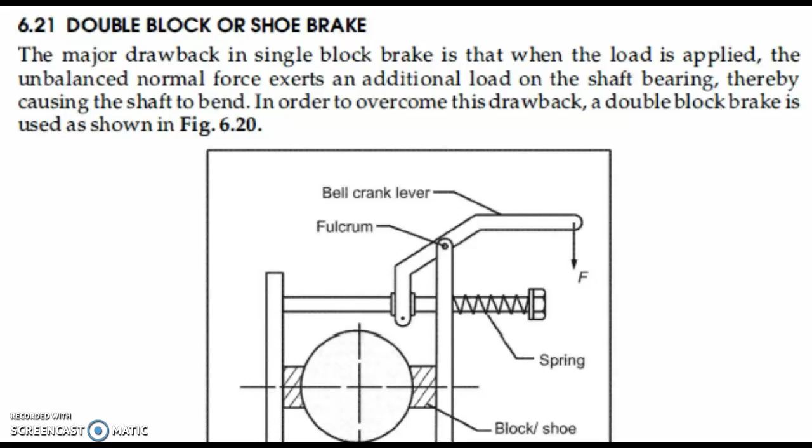Hi everyone. In this section, we will discuss the double block brake, also known as the double shoe brake. We already know about the single block brake, and we've done some problems regarding it. Now this is the double shoe brake.

Here, two hatched areas on the opposite sides of a drum are the two blocks or two shoes. These shoes are connected with a fulcrum, positioned on the bottom side. Then there is a bell crank lever situated on the top side. There is also a spring adjusted here, which is for releasing the block brake after the force is applied.

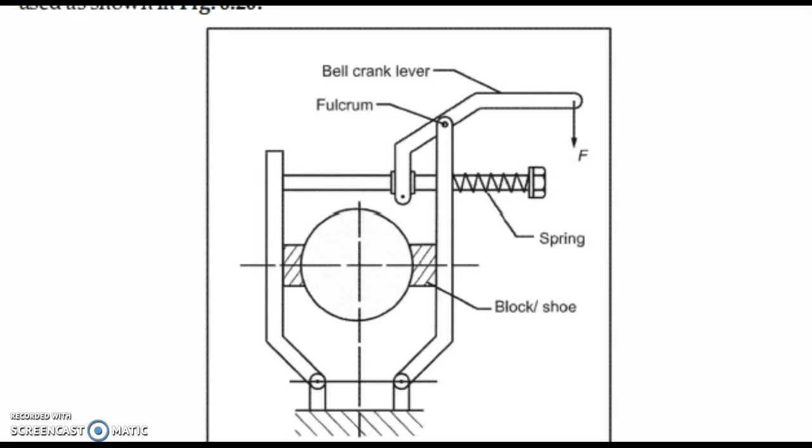Now, during free time, the wheel will rotate freely. While we apply a force here, the two blocks will automatically come to the wheel, and now the braking will happen. So we need to study how the torque will act on this figure, on this section.

Therefore we can write the torque as T equals Ft1 plus Ft2 into R. Now, what are Ft1 and Ft2? They are the tangential forces on the respective shoe. Since we have two shoes, we name them 1 and 2, so the tangential force on the first shoe is Ft1, and that of the second is Ft2.

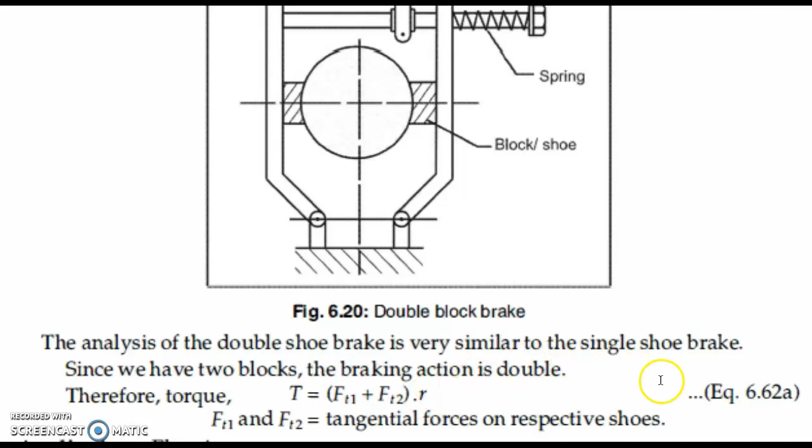This type of double block brake is generally used in electric cranes. Now we can discuss a problem.

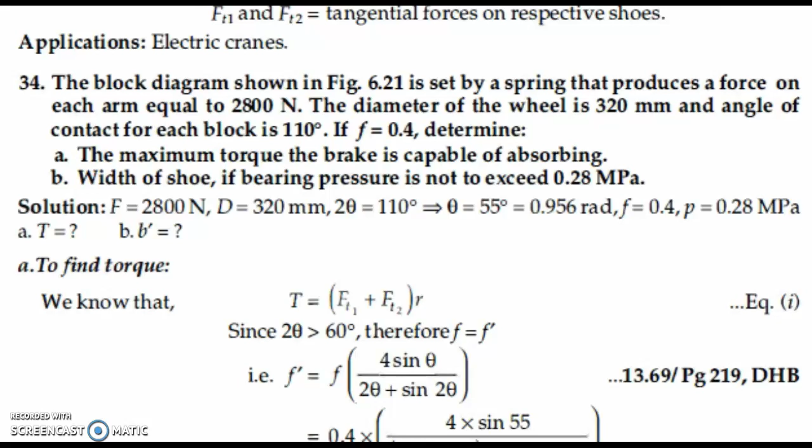The block brake diagram as shown in the figure is set by a spring that produces a force on each arm equal to 2800 Newton. The diameter of the wheel is 320 mm and the angle of contact for each block is 110 degrees. If coefficient of friction F is equal to 0.4, determine first the maximum torque the brake is capable of absorbing, and second, the width of the shoe if the bearing pressure is not to exceed 0.28 megapascal.

Now we can go for the figure. Here the angle of contact is 110 degrees, and the distance from the center of the drum to the fulcrum center is 200, and the distance from the center of the drum to the force side is 300 mm.

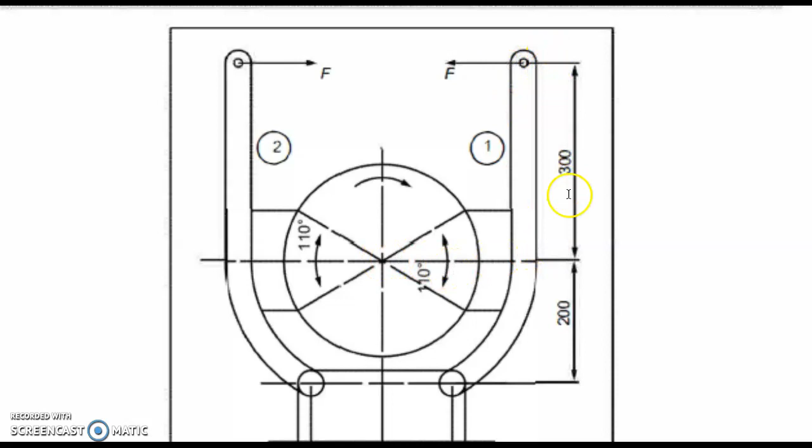Then the distance between these two fulcrums, from the fulcrum center to the center of the drum, is 50 mm. That of the other side is also 50 mm. Now we can go for the given values.

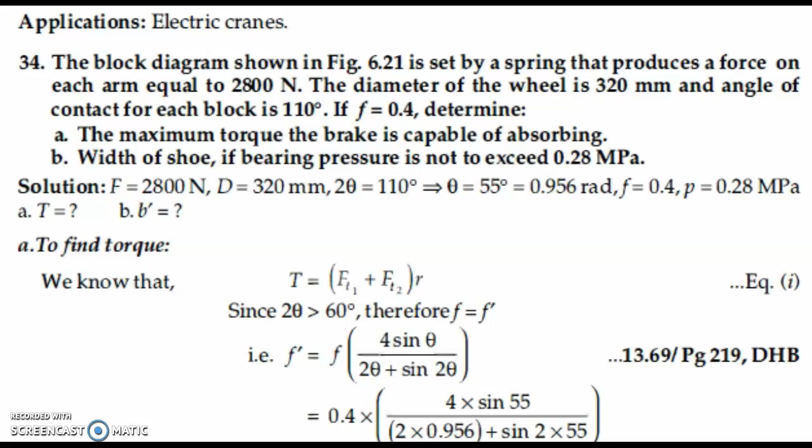What are the given values? Here the force is acting by a spring, so force is given as equal to 2800 Newton. Then the diameter of the wheel, or diameter of the drum, is given as 320 mm. Then the angle of contact of each shoe, we name it 2 theta, is equal to 110 degrees, or theta equals 55 degrees. Now the coefficient of friction is already given as equal to 0.4.

The bearing pressure is also given as 0.28 megapascal, which is given in the second condition. Now we can go for the torque. We know that T equals Ft1 plus Ft2 into R.

Now we have to find each Ft1 and Ft2, but here the value of 2 theta is greater than 60 degrees, because the given value is 110 degrees. So we have to find the value of mu dash, or F dash, instead of F or mu. The coefficient of friction will vary because the angle 2 theta is greater than 60 degrees; here it is 110 degrees. So we have to find mu dash. What is the value of mu dash?

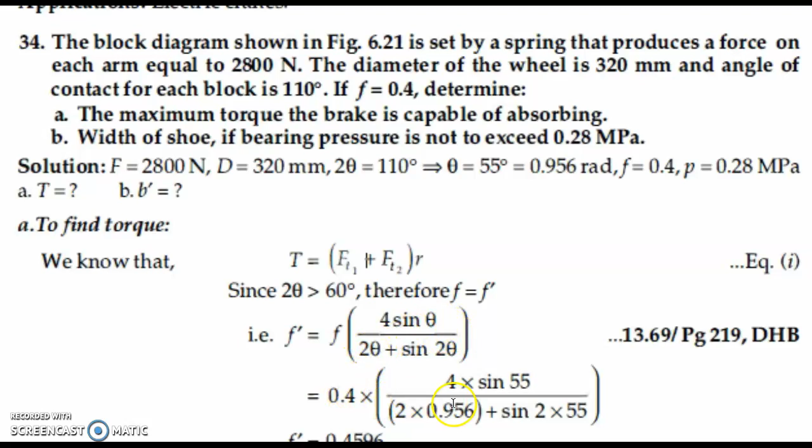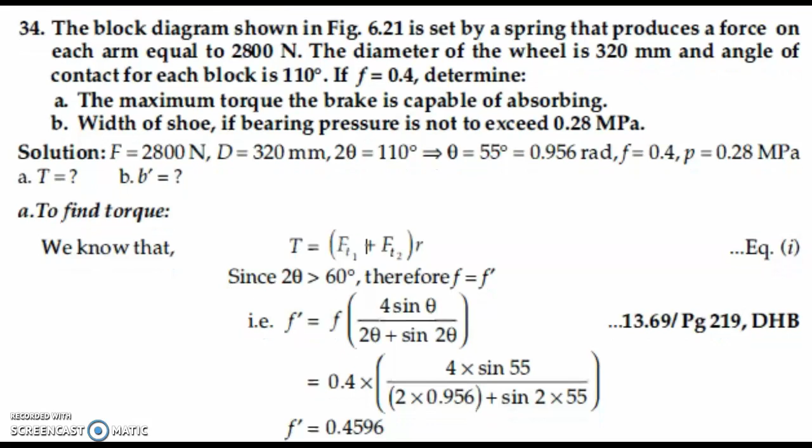Mu dash, or F dash, is equal to F into 4 sin theta divided by 2 theta plus sin 2 theta. Here theta equals 55 degrees. If we substitute these values into this equation, we will get mu dash equals 0.4596. Now we can substitute this value in the following sections.

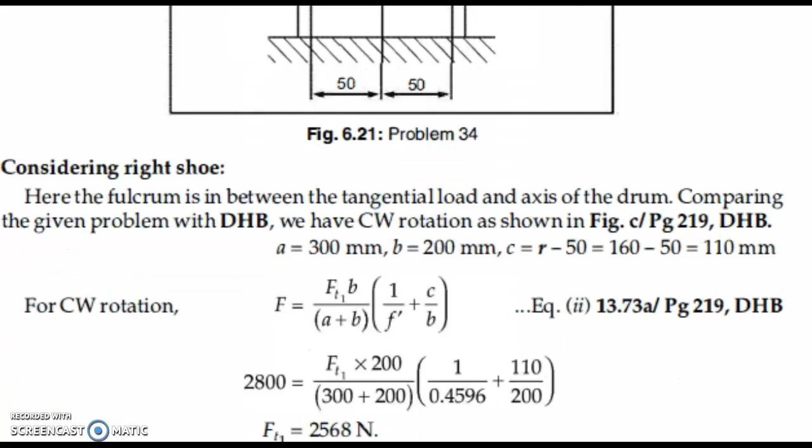Now consider the right side. We have two shoes, right side and left side. Consider the right side of the shoe, and compare this side with our data book, page number 219, figure C. What is that? Clockwise rotation of the drum.

Now A is equal to 300 mm, B is equal to 200 mm, and what is the value of C? C is the distance from the tangential force to the fulcrum center distance. Now it is radius minus 50. What is that value? 160 minus 50 is equal to 110.

If we substitute these values in the general equation, that is the equation on the right side, F is equal to Ft1B divided by A plus B into 1 divided by F dash or mu dash plus C by B. If we substitute this value, we will get Ft1 is equal to 2568 Newton. Now moving to the left side shoe.

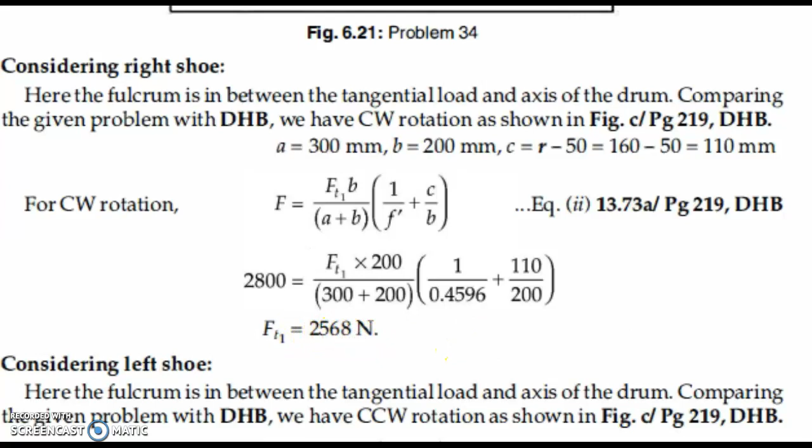What is that value? On the left side, it is considered as counterclockwise direction. On the same figure itself, we can take figure C on page number 219. For the counterclockwise direction, F is equal to Ft2, T2 for the second block or the left side block. Ft2 into B divided by A plus B into 1 divided by F dash or mu dash minus C by B. If we substitute all values, we know all other parameters here.

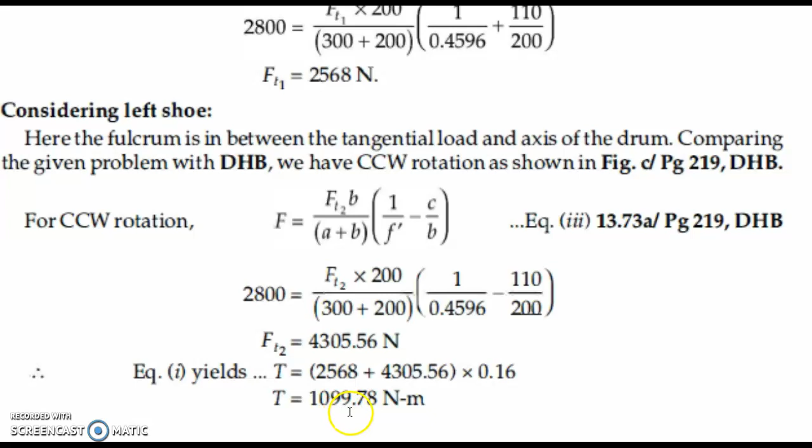Now we can find the value of Ft2. If we find the value of Ft2, we can complete, or we can find all the value of torque. How we can find the value of torque? T is equal to Ft1 plus Ft2 into R. These values are already given. That is equal to, we already calculated. That is T is equal to 1099.78 Newton meter. This is the first case.

Now moving to the second case, they are asking about width of the shoe. How we can find the width of the shoe? We already discussed in the previous problem. That is P is equal to Fn divided by projected area in the block or shoe. That is, we can write it as pressure. Bearing pressure is equal to Fn max divided by B dash 2R sin theta.

Then what is the value of B dash? We have to find that with B dash. All other data are given. Then, but we don't aware about N or that N1 value. How we can find the Fn1? Fn1 is equal to Ft1 divided by mu dash or F dash.

If we substitute these values, we will get Fn1. Similarly, we can find Fn2. Which one is greater? That is used in our bearing pressure equation. So, we have to find Fn1 and Fn2. Here, for Fn1, the value is equal to 5587. But for Fn2, it is equal to

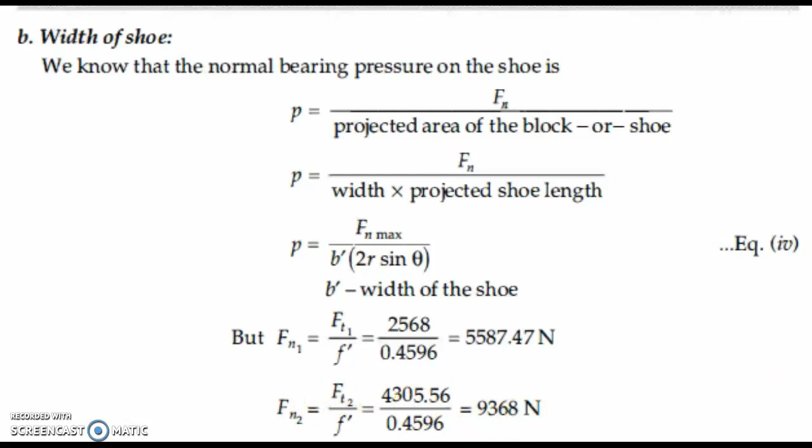9368. And the maximum value is 9368. So substitute this value, that is 9368 in the equation. Then we can find the value of B dash. That is the width of the shoe. If we substitute all the parameters in this equation, we will get B dash is equal to 128 millimeter.

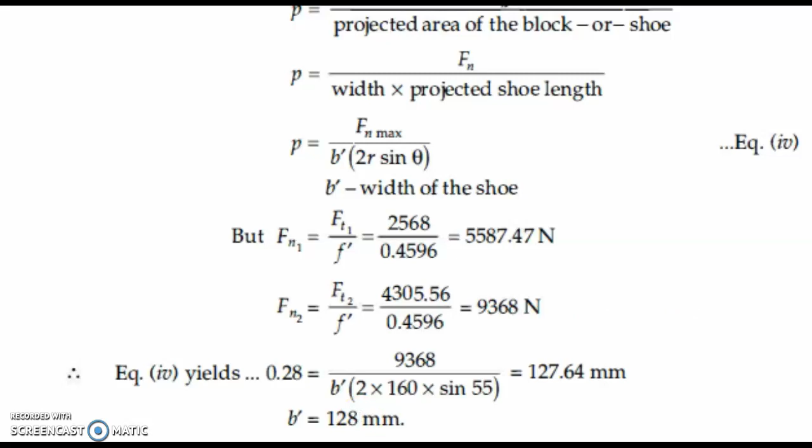This is the condition. And moving on to the continuation of the question, the question itself we can continue like this. If in the above problem the torque absorbed is 2000 Newton meter, determine the force necessary to set the brake. In the previous condition itself, they are given the torque value, that is equal to 2000 Newton meter, and they are asking about what will be the force necessary to set the brake.

What is the value? T is the value that is equal to 2000 Newton meter. Then F dash we already calculated just before. So mu dash or F dash is equal to 0.4596. Then we find the value of Ft1 in terms of F. What is that value? Ft1 is equal to 0.9172 into F.

Don't substitute the value of F here. They are given the value of torque. And now we can go for the second side or left side. Similarly, we will get Ft2. It is not Ft1. Ft2 is equal to 1.537 into F.

And finally, we can conclude this. That is, the torque T is equal to Ft1 plus Ft2 into R. Now, the torque is given as the second condition. That is, 2000 Newton meter is given. And Ft1 and Ft2 we find the value in terms of F. Now if we substitute this value, then radius is also given. If we substitute these values in this equation, that is the general equation, then we will get F is equal to 5091 Newton. So this is another condition, another kind of question.